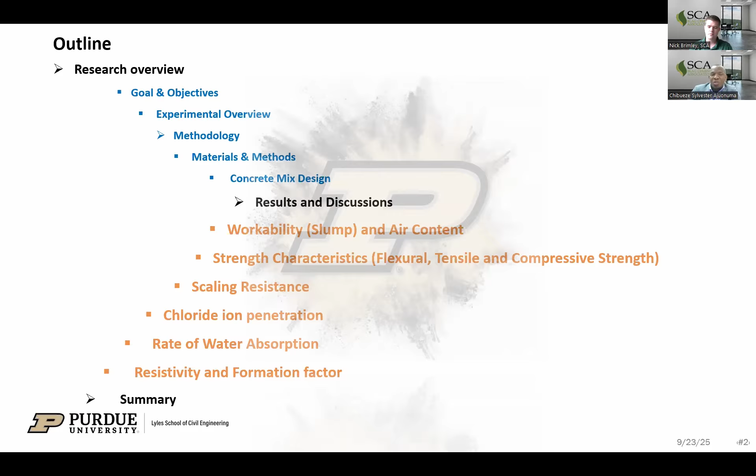Under the results, we look at some fresh properties, where we consider the slump, the air content, and then some strength characteristics: flexural, tensile strength, and compressive strength. Most especially, we look at the durability performance of the concrete specimens, where we consider the scaling resistance, the chloride ion penetration, rate of water absorption, as well as the resistivity and formation factor.

We know that there's a growing demand for sustainable construction, and it's driving innovative solutions aimed at enhancing both the durability and service life of concrete structures. One of those can be attained by improving the quality of the microstructure of concrete through curing. Superabsorbent polymer, known as SAP, is one of such innovative materials, which tends to create reservoirs within the concrete that helps to provide additional water, additional moisture, within the cementitious matrix that improves the hydration of concrete.

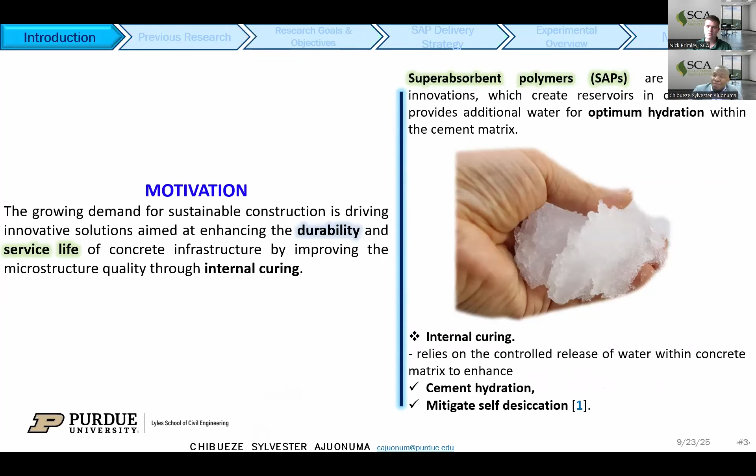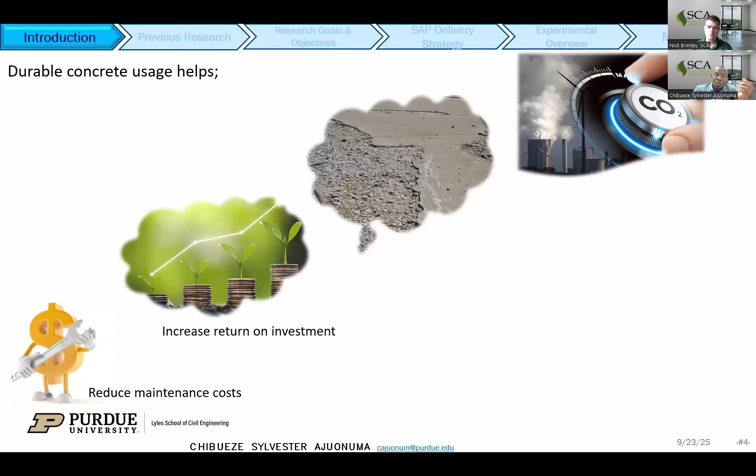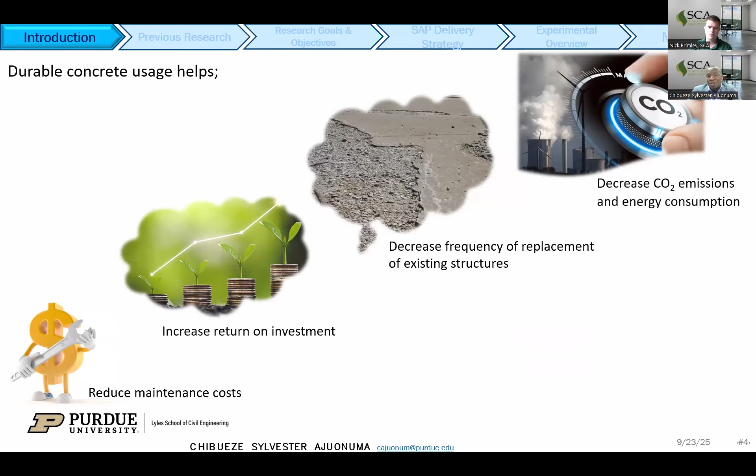We found out that for internal curing, it relies on the controlled release of water within the concrete mixes. This helps to improve hydration, reduces and mitigates self-desiccation in concrete structures. All of this is geared towards producing a more durable concrete, because durable concrete helps to reduce the maintenance cost of concrete infrastructures, increase the return on investment of concrete infrastructures like bridge decks, and decrease the frequency of replacement of these structures. Most especially, it results in a decrease in carbon emission and energy consumption.

Just a brief overview of superabsorbent polymers. They are majorly known as hydrogels. They are cross-linked polymers that have the capacity of absorbing moisture and water in large volumes compared to their own weight, and then they end up forming insoluble gels.

They are predominantly used in hygiene products such as Pampers, and for agricultural purposes, where they are used to moisturize the soil. They tend to absorb excessive water from the soil, and then during periods of drought, they give it back to the soil.

But we are trying to incorporate this material into concrete because we found out it can be beneficial for internal curing. It can serve as an internal water reservoir for concrete, and also can be an alternative to using pre-wetted aggregates, which is most times difficult in the mix design.

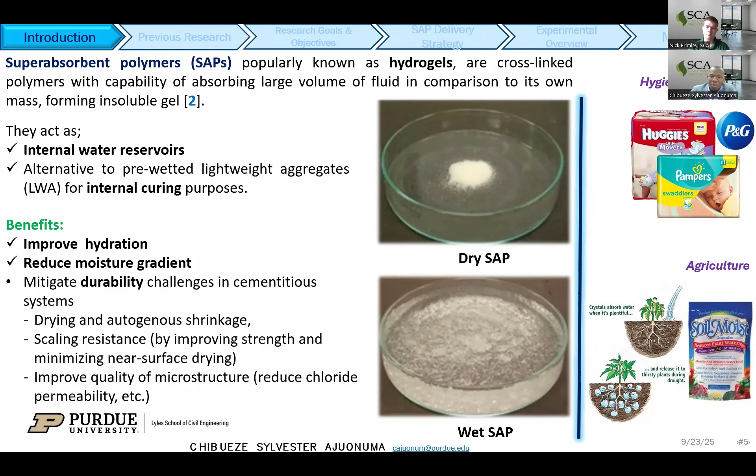Some of the benefits include improved hydration, reduction in moisture gradients, and mitigating durability challenges in cementitious systems such as drying and autogenous shrinkage, and scaling resistance. It helps minimize near-surface drying of the concrete, and most especially improves the quality of the microstructure to give a more durable concrete.

We were able to find the absorption capacity of the superabsorbent polymers in cementitious mortars, the effect of whether extra water is needed, and how we can incorporate the superabsorbent polymers into the concrete for effectiveness.

Some of the outputs we generated showed comparable and improved mechanical properties of the cementitious mixtures. There was also a reduction in autogenous shrinkage, which is key. We also found improved hydration, as well as improved durability of the cementitious mixtures.

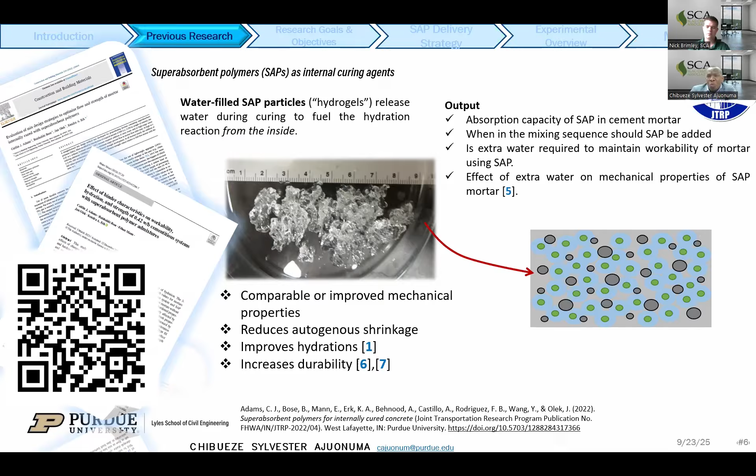Beyond what we did before, for this project the goal is to determine how the delivery method and mixture composition can influence the internal curing performance of concrete formation, using a commercial SAP formulation with the new Type IL cement and supplementary cementitious materials like slag, plus the addition of colloidal nanosilica.

The research objective for this project is to evaluate the internal curing performance of the commercial SAP in this concrete mix, and most especially to develop and evaluate practical strategies to successfully deliver SAP in concrete, especially for real-world application.

Finally, the objective was to conduct a field trial to evaluate the strength and durability performance of mixtures, comparing those cured with commercial curing compound and those cured using superabsorbent polymers.

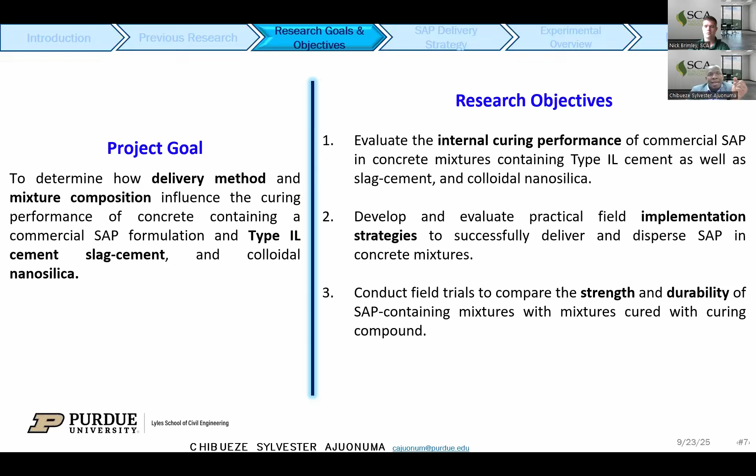I also want to emphasize this. One of the studies in terms of objective 2, regarding an effective way to deliver SAP in concrete, there's a way where they tried to add SAP for commercial large-scale application.

They used repulpable bags, but it was ineffective. As you can see here, at the end of the day, even after mixing 40 plus revolutions in a concrete mixer, they found out there was still dry SAP present, and the bag did not dissolve.

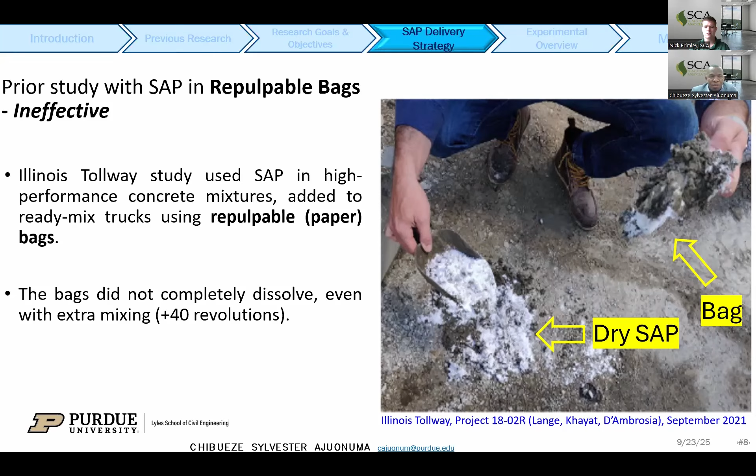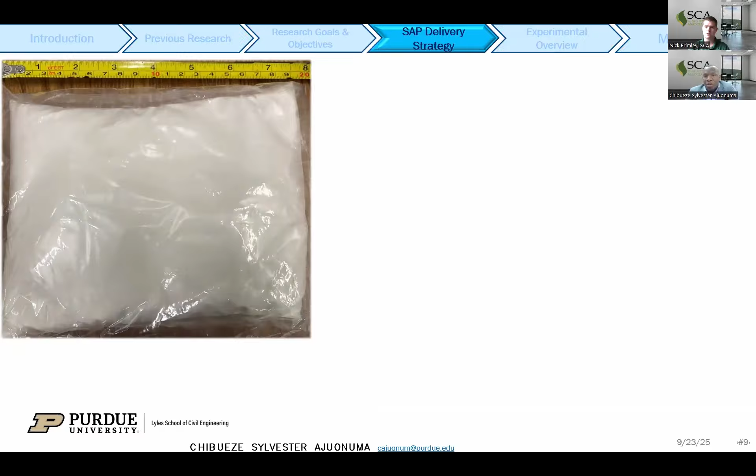So in order to solve this problem, we were able to propose a practical way whereby we use dissolvable bags. The SAP is repackaged using dissolvable bags, and we found out that approximately 1 pound of dry SAP can be used for 1 cubic yard of concrete, at a rate of 0.2% by the weight of the binder.

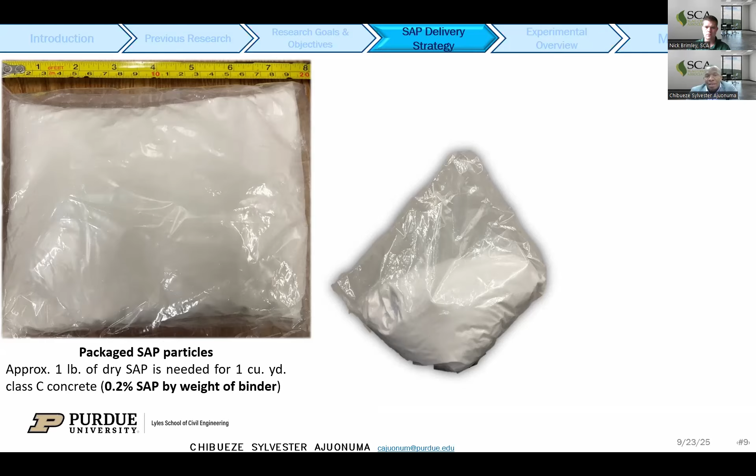This dissolvable bag, for storage purposes, is enclosed in an outer waterproof bag. Usually we open it and then add the dissolvable bag directly into the mixer, and it was very effective.

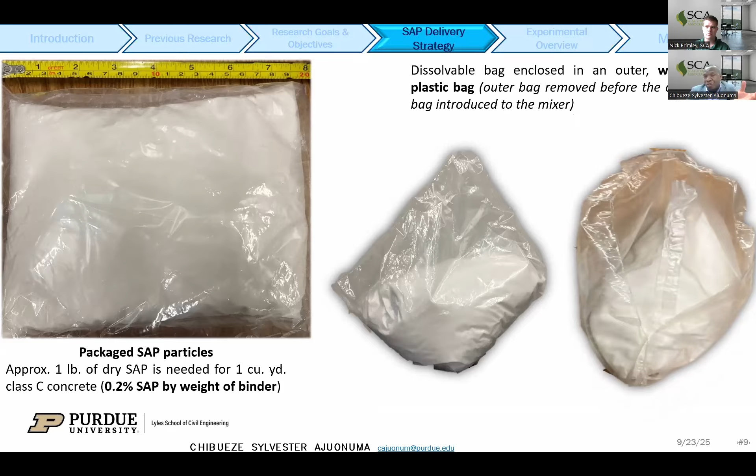But before we were able to carry out this experiment for the field trial, we tried to do some laboratory experiments to see the effectiveness of using dissolvable bags. So in the next phase of this talk, the webinar, these are some of our laboratory experiments.

These are the conventional concrete mixing materials we used: for cement, we used Type IL cement; for slag, we used slag grade 100; and also the coarse aggregate and fine aggregate, the superabsorbent polymers, and the admixtures used for the concrete.

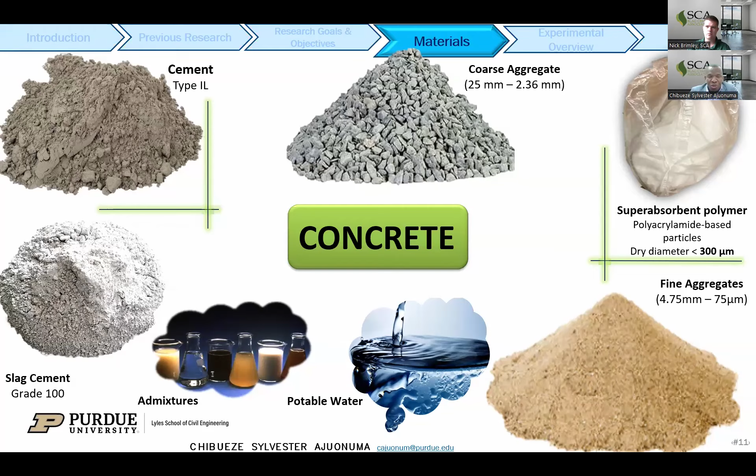For the mix design used in the lab scale experiments, we designed 5 concrete mixes at a constant water to cement ratio of 0.44. We wanted to evaluate how effective the dissolvable bag we proposed is at dispersing SAP, and how effective it is for internal curing purposes.

So we had the reference mix, and then we had 2 delivery methods where we added the SAP: using the dissolvable bag, and secondly, directly pouring the SAP into the concrete mixture. We did this for the reference mixture where we just added SAP, and also for the 30% cement replacement using slag, in which we added the SAP directly, and also using the dissolvable bag. Our target slump was between 3 to 7 inches, and the target air content was 5 to 8%.

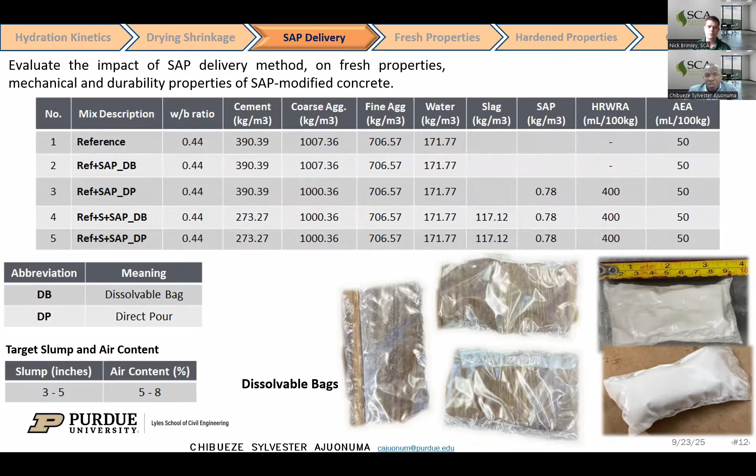Due to the volume of concrete we needed, we had to scale down the bag to a smaller scale, because we needed a small quantity of the SAP at 0.78 kilogram per meter cube of concrete. So we scaled down the bag, and here are some of the results we obtained from the laboratory experiments.

Here we had the results for the fresh properties, where we tested the slump and the air content. We found that the addition of SAP reduces the slump of the concrete, but we also found a comparable result both in air content and slump for the addition of SAP using the dissolvable bag versus directly pouring the SAP, showing the effectiveness of addition of SAP using the dissolvable bag.

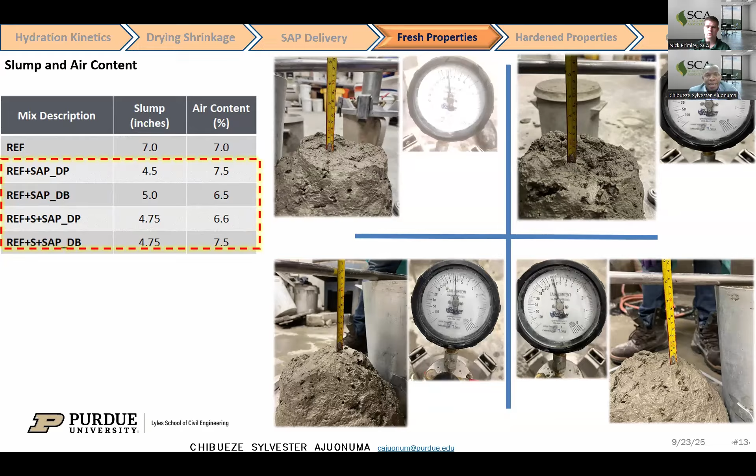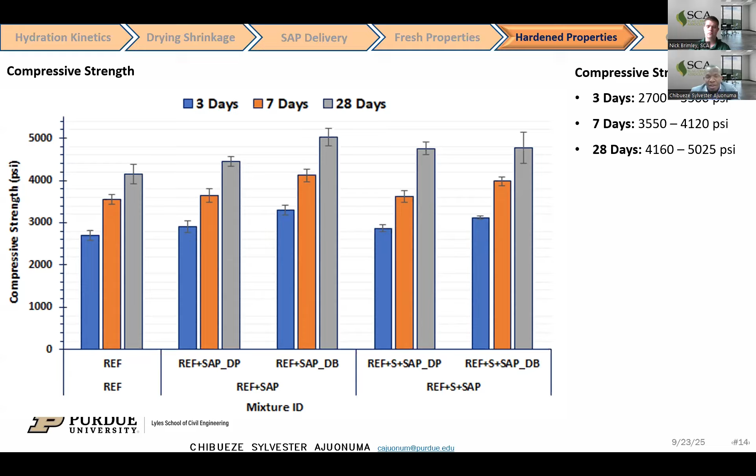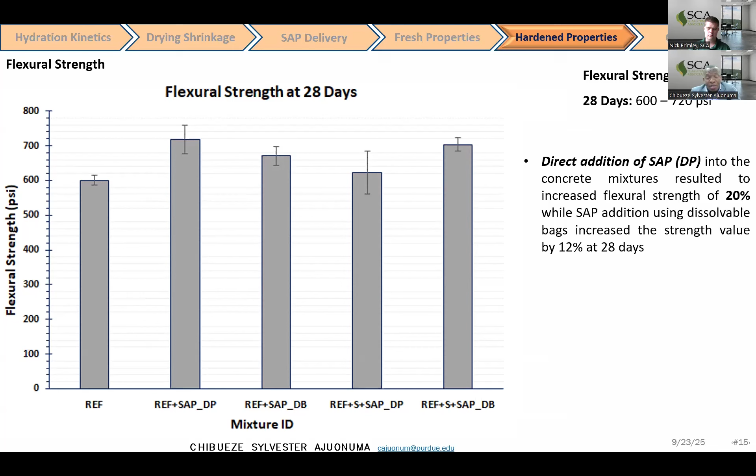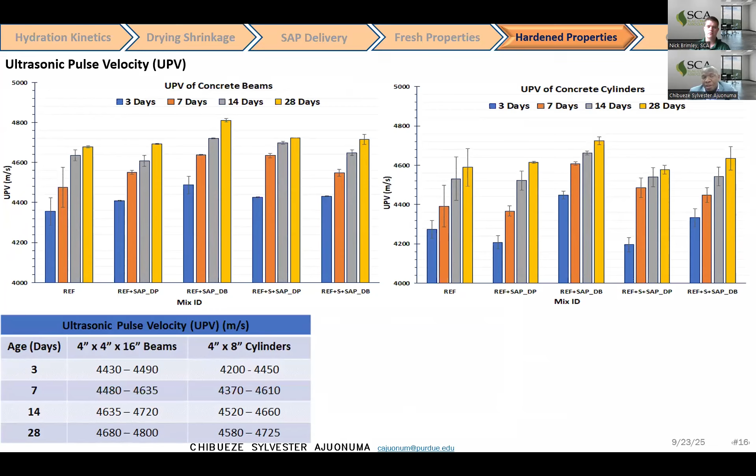We also evaluated the flexural strength at 28 days, and saw similar strength parameters increasing with age. We also evaluated the ultrasonic pulse velocity to assess the homogeneity of the concrete matrix, with results at 3, 7, 14, and 28 days. We saw a steady increase in pulse velocity with age, and again a comparable result between directly pouring SAP and using the dissolvable bag.

Armed with these results, we proceeded for the field trial.

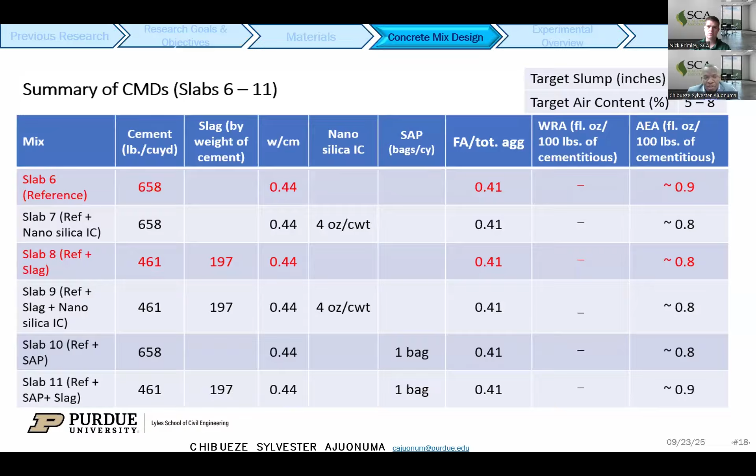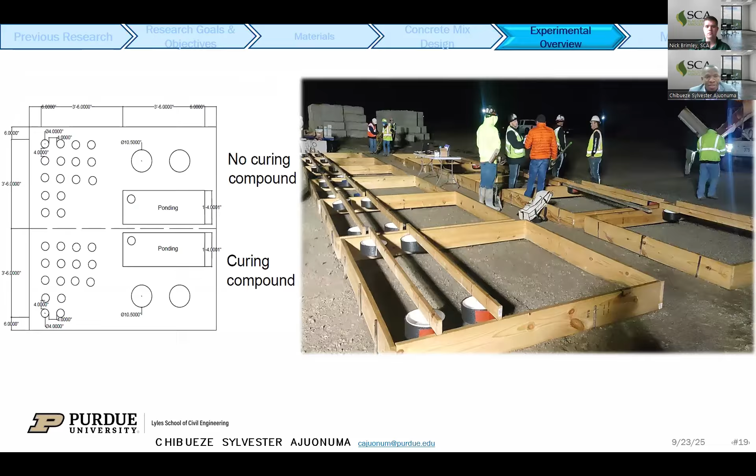Here's an overview of some pictures from the field. The concrete mixers—like I said, we employed the services of a commercial concrete mixing company—and the concrete mixes were done.

We tested the fresh properties for every mix, evaluating the air content and the slump.

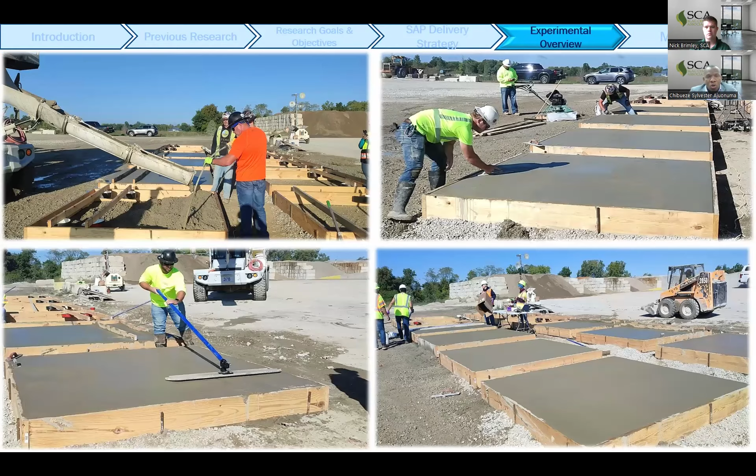We also addressed the concrete surfaces, because we wanted to ensure we obtained the utmost real-life application, so we employed the services of professional concrete finishers, and the slabs were properly finished.

I also want to emphasize the curing process: the slab was partitioned, and half of it was covered with plastic sheets, whereas the other half had curing compound applied to the slab.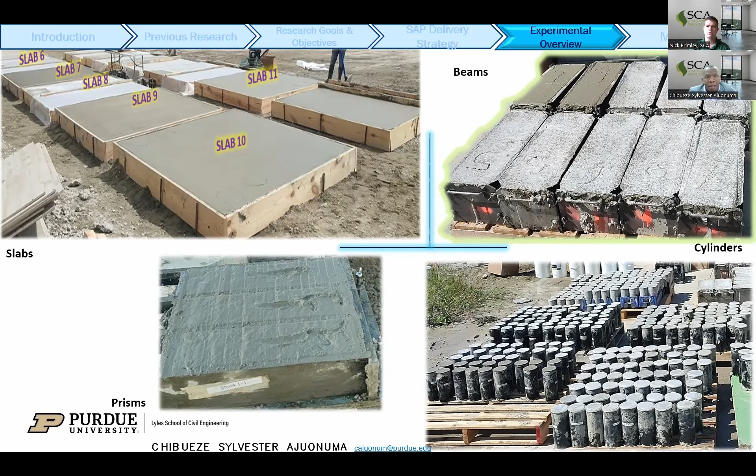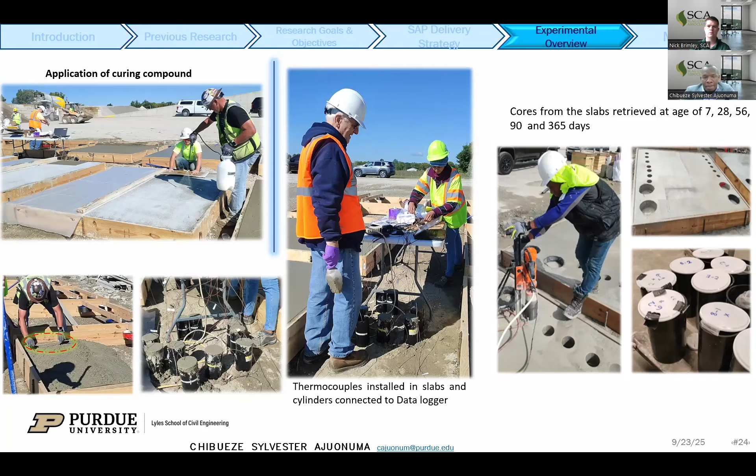Also, before the concrete for the slabs was poured, they were instrumented with thermocouples so that we could evaluate the temperature of the concrete mix over time. And at each of the testing ages, 7, 28, 56, 90, and 365 days.

Cores were extracted from the slabs, tested and brought into the research laboratory. I also want to emphasize that we had two different curing regimes for this project. Some specimens were cast in the field but brought back to the laboratory so we could condition them at a constant temperature of 23 degrees Celsius and relative humidity of 50%, and they were also exposed to wet curing.

For variability, some samples were cured using curing compound and some without, indicated by NC for no compound and CC for those cured with curing compound. We also had some specimens cured using addition of colloidal nanosilica, indicated by NS1, and others cured using SAP.

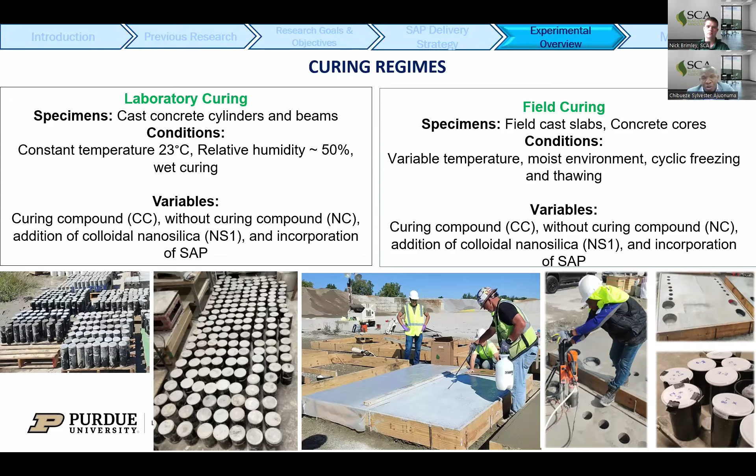We also had field specimens, where the concrete slabs were cast and left in the field for a period of 365 days. For them, conditions included varying temperature, moist conditions, and cyclic freezing and thawing, as well as curing compound versus no curing compound.

Moving on, we proceed to some of the methods used to extract our results. We evaluated the fresh properties, including air content and workability of fresh concrete, and the compressive strength at 7, 28, 56, 90, 180, and 365 days.

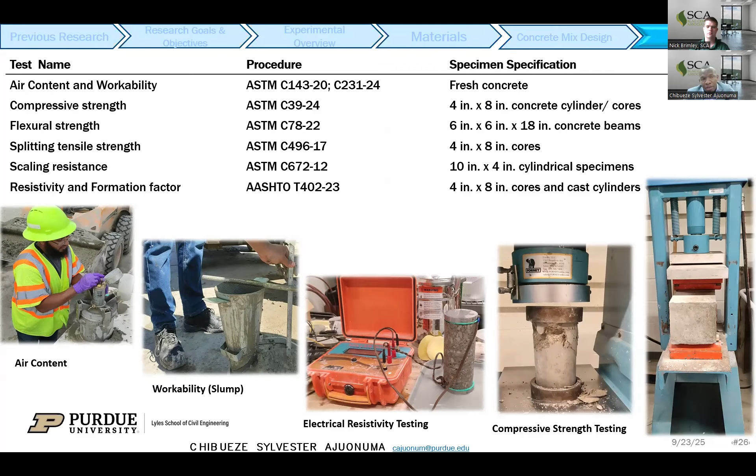Cores were also extracted from the field. We evaluated flexural strength for the beams, splitting tensile strength, scaling resistance, resistivity, and depth of chloride ion penetration. Here is an overview of the specimens used for the scaling resistance test.

Concrete scaling resistance is an experiment designed to evaluate the durability of concrete surfaces, specifically their ability to resist scaling when subject to cyclic freezing and thawing in the presence of de-icing chemicals such as sodium chloride or calcium chloride.

For the test specimens, we used 10-inch by 4-inch diameter cylinders extracted from the field after 28 days of casting. Specimens that had curing compound on them were power washed to clean the surface, and all were kept at ambient condition at 23 degrees until testing.

After that, we built a 2-inch dike around them, then added the de-icing compound, a calcium chloride solution, at 0.5 inch depth, and they were exposed to 50 cycles of freezing and thawing.

We had freezing at -18 degrees Celsius for 16 hours, then thawing at 4 degrees for 8 hours. The de-icing compound was replaced every fifth cycle, and this was repeated for 50 cycles.

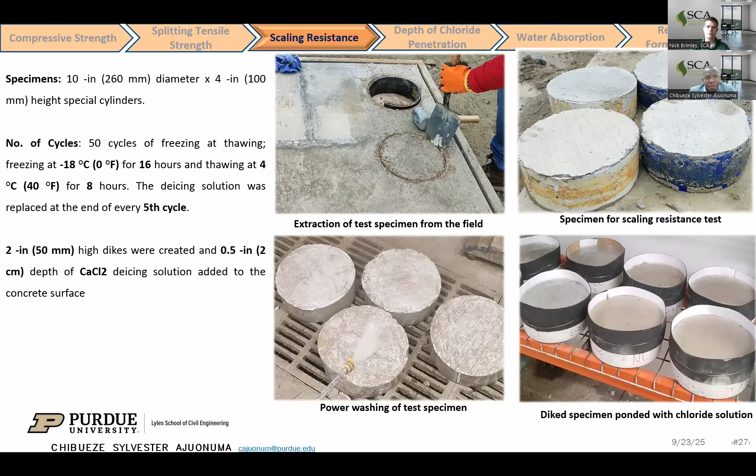Also, for the slabs in the field, they were ponded. We created dikes on the slabs after 28 days of casting, then ponded them using a 4% calcium chloride solution, maintained for a period of 150 days, to simulate real-world chloride exposure conditions. The dikes were carefully covered to avoid contamination and evaporation of the compound.

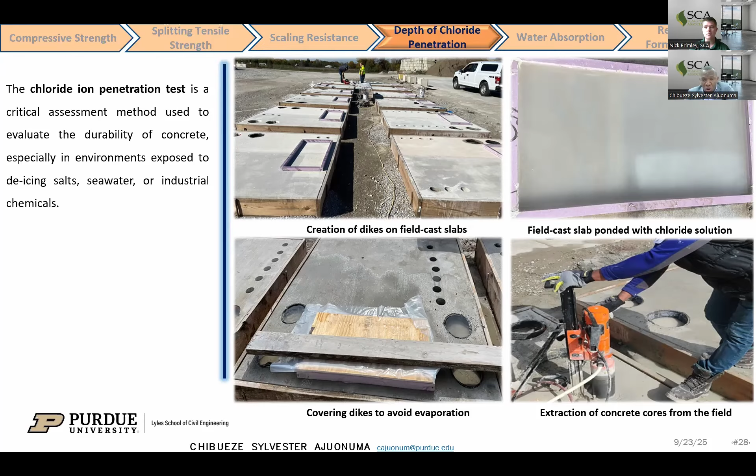At the end of 150 days, the surfaces were cleaned and cores were extracted from the diked portion, then split, and silver nitrate was sprayed on the surfaces to obtain distinctive chloride profiling.

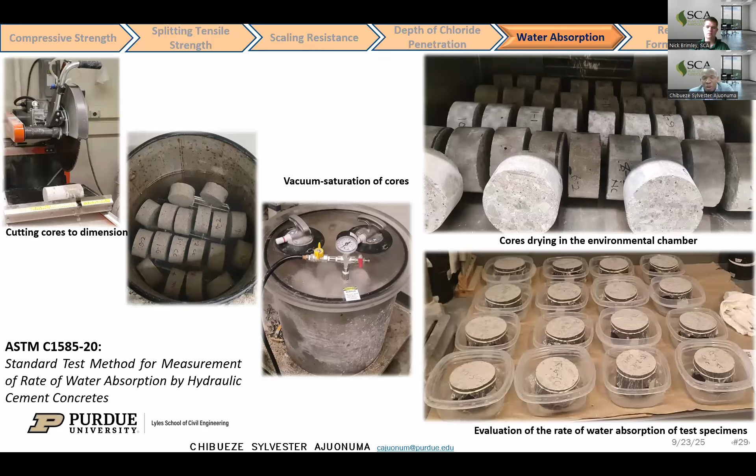For water absorption experiments, cores were extracted and cut to the required dimension, then vacuum saturated and conditioned in the environmental chamber. After that, we were able to evaluate the rate of water absorption.

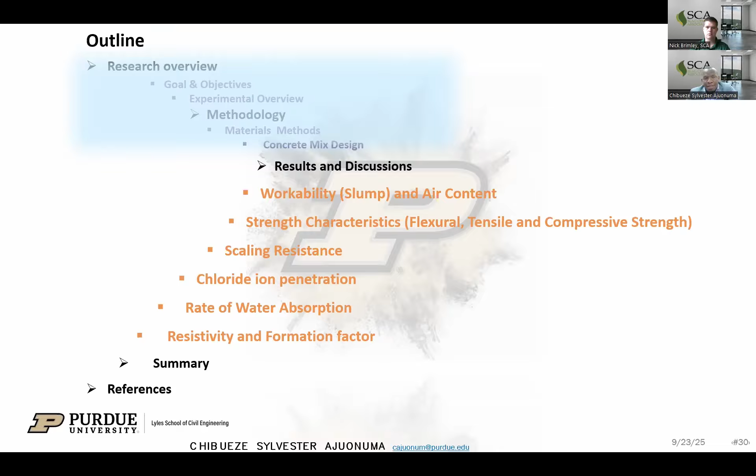Now that we've introduced the project, highlighted the goals and objectives, and explained some of the experiments done in the field, I'll shift gears to the results we obtained. We'll look at results for workability, fresh properties, strength properties, durability properties, and finally a conclusion.

For the fresh properties, as I mentioned earlier, the target air content was 5 to 8%, and the target slump was 3 to 7 inches.

We noticed that the addition of SAP to the concrete mixes reduced the slump value, but all the concrete mixes we tested were within the design target values. The reduction in slump can be improved by adding a super plasticizer, but for this project, no super plasticizer was used. If you want to increase the slump, you can add a high range water reducer.

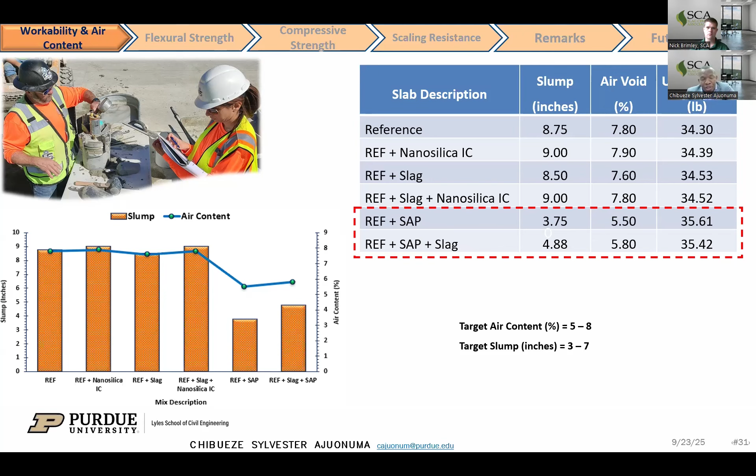These are some pictures from the field showing the reduction in slump caused by the addition of SAP.

For flexural strength, the beams were tested at 4 days because we wanted to evaluate how fast the road could be opened to traffic if this SAP mix was used in the field. We evaluated flexural strength at 4 days and found a range between 410 to 550 psi. The INDOT standard states the minimum modulus of rupture at 7 days is 570 psi for structural concrete, so we achieved 550 psi at just 4 days.

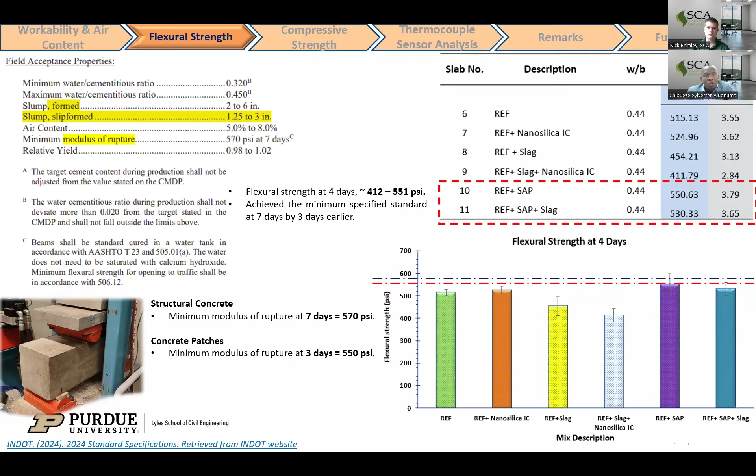For compressive strength, the values were evaluated at 7, 28, 56, 90, and 365 days. We saw a gradual increase in compressive strength with age. On the left side of the plot are the compressive strength results from the cast samples we brought back to the lab, whereas the right side shows results from the cores we extracted and tested.

We found that the incorporation of admixtures such as nanosilica and slag improved the strength properties, especially at later ages. We saw increases of 14%, 23%, 25%, 30%, and 48% at 7, 28, 56, 90, and 365 days respectively for the 30% slag replacement.

But for the core samples, we saw a kind of variation in the strength properties.

We also noticed that the addition of superabsorbent polymers into the mix improved the hydration of the cementitious matrix, resulting in increased mechanical properties such as compressive strength, as a result of internal curing by the SAP particles. If you compare the reference bar, the first set of bars, with the fifth set of bars, you'll see a steady increase in compressive strength at all curing ages.

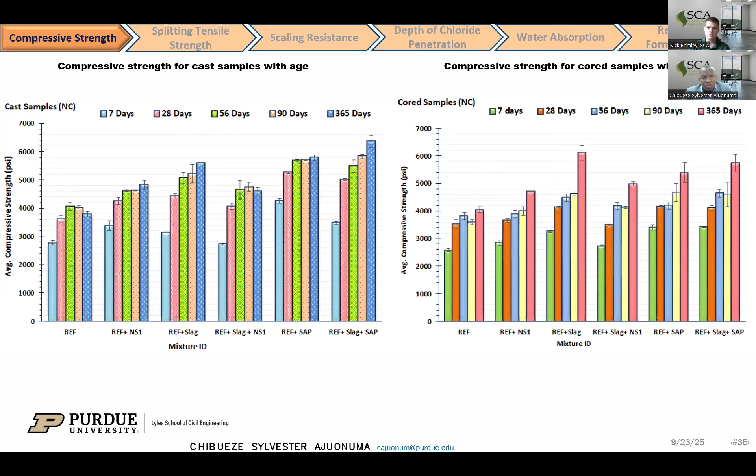For curing conditions, as explained earlier, we had 4 different curing conditions: a reference mix with no curing compound applied, mixes with curing compound applied (labeled CC), a third set with colloidal nanosilica, and mixes with the addition of SAP.

We found that the incorporation of the curing compound had a slight effect on compressive strength, especially for samples left in the field. The plots above show samples cured in the lab, and those below show samples extracted from the field. The addition of curing compound had a slight effect on compressive strength.

We noticed a consistent increase in compressive strength comparing the reference mix without curing compound to those with SAP added: a 54% increase at 7 days, and 45%, 40%, 42%, and 53% increases at 28, 56, 90, and 365 days respectively for the mixes containing SAP.

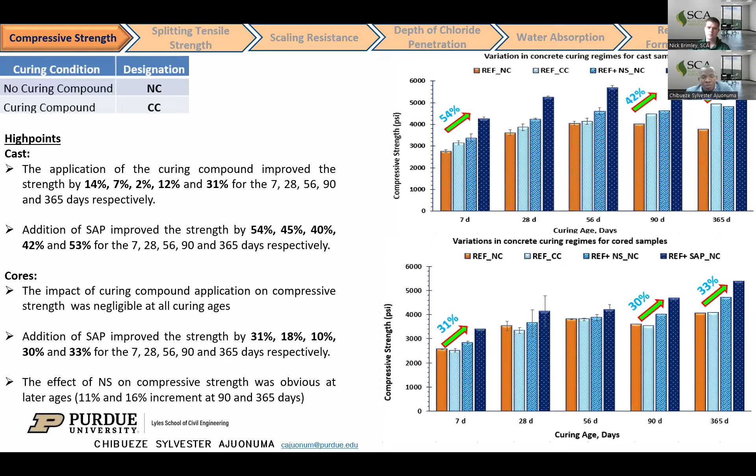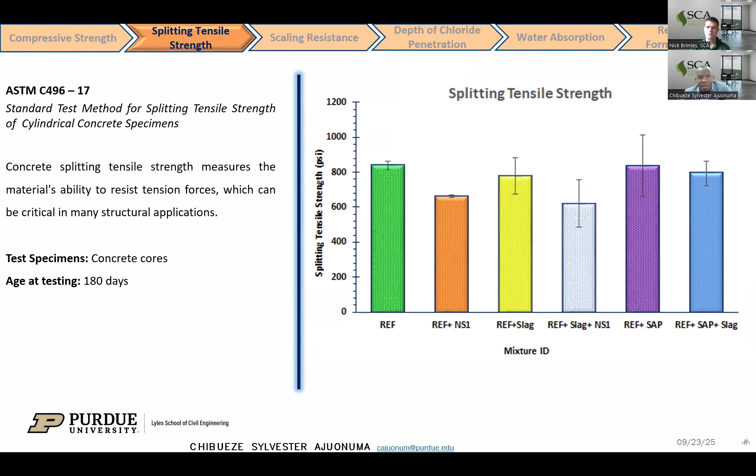Now regarding durability performance, these are some results from the scaling resistance experiments we carried out. We evaluated this using a surface visual rating scale, which shows severe rating at 5, and no scaling at 0.

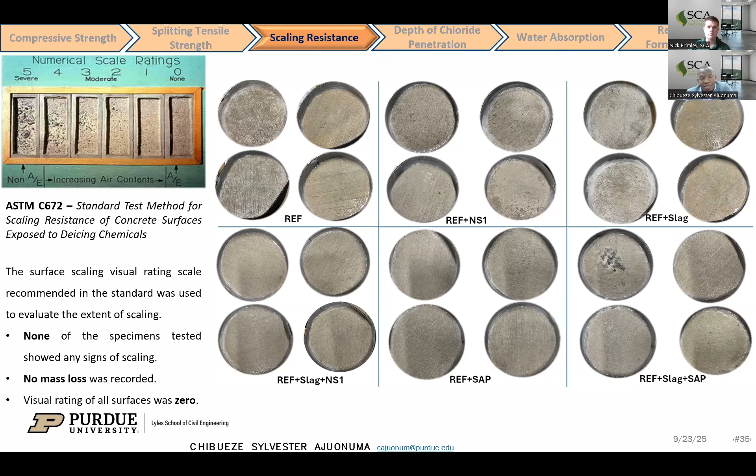So for all the specimens that we evaluated, none of them showed any sign of scaling. There was no mass loss recorded for the 50 cycles, showing that there was an improved performance of the concrete structures which have a strong resistance to scaling.

For depth of chloride penetration, after the specimens were extracted and split, we did a profiling and found out that the depth of chloride ion penetration was in the range of 1.5 to 2.0 cm, with the reference mix having around 2.5 cm. Using this baseline, we found out that the addition of slag greatly reduced the depth of chloride penetration, signifying an improvement in the microstructure and resulting in a denser concrete mix.

And also if we check the mix with SAP, there was also a reduction in the depth of chloride ion penetration.

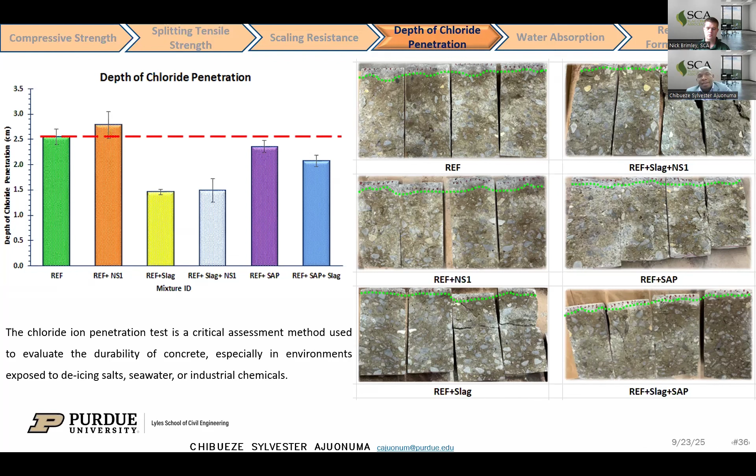We also evaluated the water absorption. The same trend that happened in the depth of chloride penetration was also evident in the rate of water absorption. The addition of slag helped to reduce the water absorption. This can be beneficial, as it will help to reduce the ingress of water and substances that can be detrimental to the concrete.

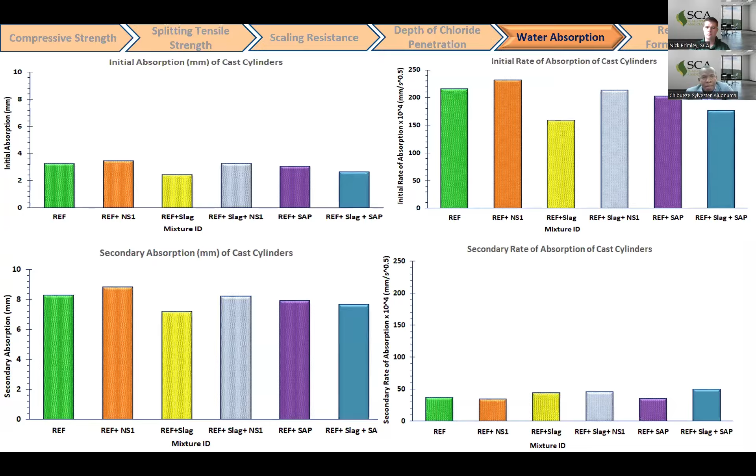Finally, we also evaluated the electrical resistivity, which helped us assess the influence of concrete microstructure and durability, especially with respect to the ingress of water. We found that the concrete specimen with a greater volume of interconnected pores showed lower resistivity, but those with a lower volume of interconnected pores, such as the concrete specimen with slag, resulted in higher resistivity, which can be beneficial to the concrete infrastructure in terms of durability performance.

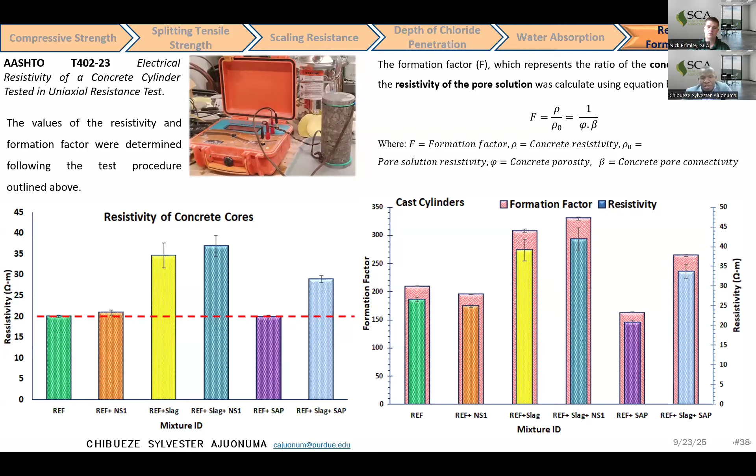In summary, having performed this field experiment, we're able to establish that the use of dissolvable bags was an effective approach to deliver SAP in the field, giving appropriate dispersion and mixture consistency.

We also found that SAP improved the early flexural strength, as well as significantly improved the compressive strength performance of the concrete mixtures when compared with SAP-free mixtures, with values of between 30 to 50% strength increase compared to those without SAP.

Most especially, we saw that mixtures containing slag and SAP displayed reduced chloride penetration depth when compared with the reference mixture and the SAP-only mixtures. So we found that the combination of SAP and slag appears to provide a synergistic effect, together reducing the permeability and enhancing the resistance to chloride ion penetration.

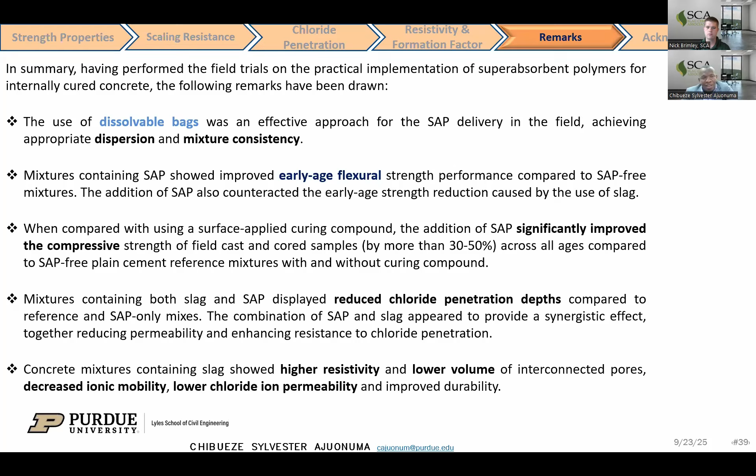There was also higher resistivity in mixes containing slag, which shows an improved durability.